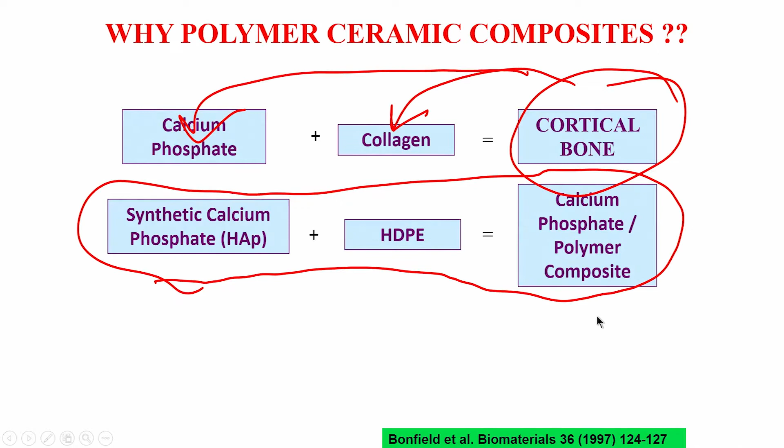These things I have already discussed at length in one of the earlier lectures. So let us start with this tribological study.

The results that I will be showing you in the next few slides are all published in the open literature, and the reader can go through my publications for a more detailed discussion on these particular results.

We have used the fretting wear tester, and the functioning of this fretting wear tester I have also discussed in one of the earlier lectures. Here is a very quick recap of what I mentioned earlier.

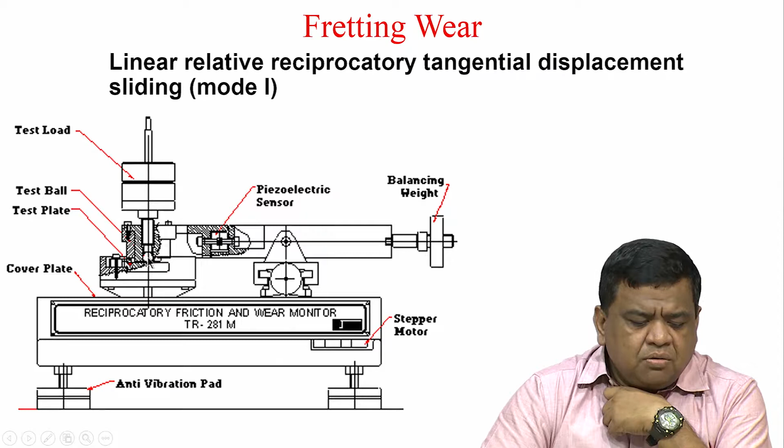So this is your ball and this is the flat. The relative motion at this interface will be actuated by this loading geometry as well as this stepper motor and so on.

This stepper motor is connected directly to this flat. So essentially the ball and flat, with this stepper motor, a very small amplitude relative displacement can be initiated at the ball and flat interface, and through this piezoelectric sensor you can record the frictional force.

This frictional force can be recorded online, and then later used to calculate the coefficient of friction.

Through this test load, this dead weight, you can vary the normal load on this ball and flat kind of geometry.

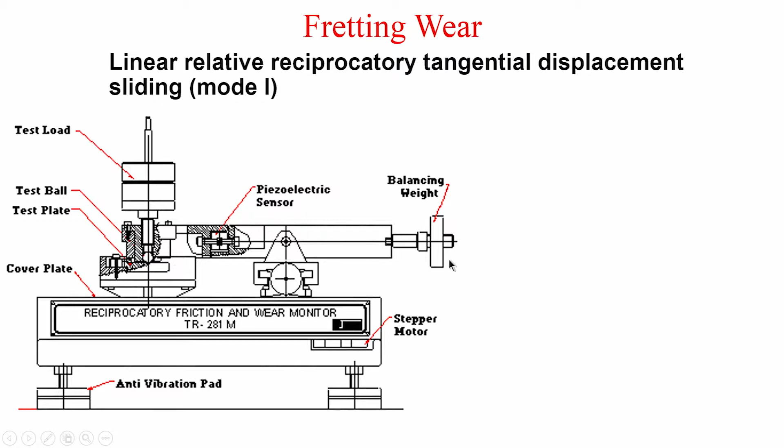As already discussed in the earlier lecture, you have a ceramic or metallic ball, there is a relative displacement, and this is called the stroke length. The stroke length in case of fretting wear varies somewhere between 100 and 200 micron.

This is the high density polyethylene, hydroxyapatite and alumina composite, used with different compositions as flat materials.

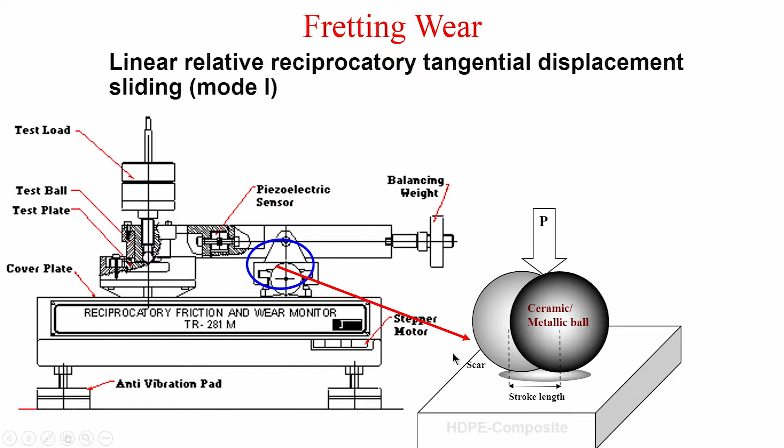While three different mating materials are varied in our study, the constant operating parameters we used are: normal load 10 Newton, frequency 10 hertz, displacement amplitude 80 micron, temperature around ambient temperature, and number of cycles 100,000 cycles.

For the testing environment, we have used dry ambient conditions as well as SBF, that is simulated body fluid.

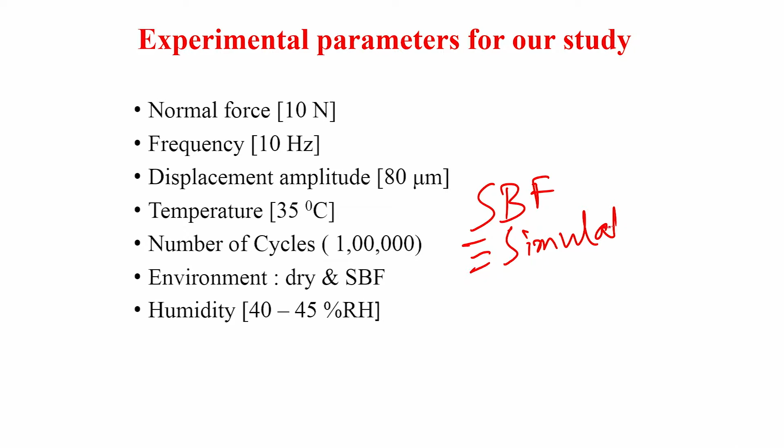Simulated body fluid. So dry means this is either ambient or SBF, and this is your normal load. Normal load is around 10 Newton.

Now this simulated body fluid contains several salts, like NaCl and KCl, with a particular ratio so that the pH is maintained at around 7.4, in terms of chloride ion concentration, pH, and several metallic ions like sodium and potassium ions and so on.

This will mimic very close to the physiological body environment. So that is the reason that normally in many friction and wear experiments which involve biomaterials, they always use the simulated body fluid.

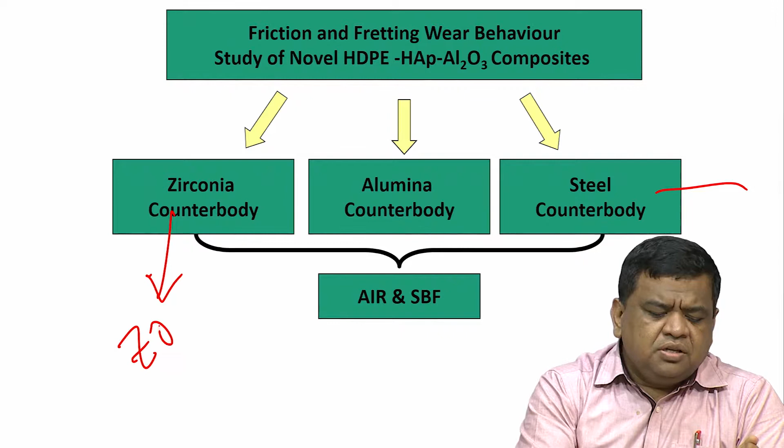So this is the 3 different counter bodies. This is zirconia, the yttria stabilized zirconia we have used; this is the alpha alumina we have used; and this is the steel bearing steel counter body.

Now why these different things, and why we have used ambient conditions and SBF? Why 3 different solids? Because in real life applications, if you recall, you have this femoral stem, and on this femoral stem you have this femoral head, and this femoral head is in contact against this acetabular socket.

Or acetabular liner, which is often metal backed, that is for non-cemented ones. For cemented ones, if the acetabular liner contains hydroxyapatite, it has good osseointegration, and then one can use bone cement. So this is your femoral head FH, and this is your acetabular socket.

Now this acetabular socket is typically made up of ultra high molecular weight polyethylene. So in this study we are trying to evaluate whether that can be potentially replaced by high density polyethylene, HAP, alumina. In order to simulate the clinical scenario in the lab scale study, it is important to consider the femoral head materials.

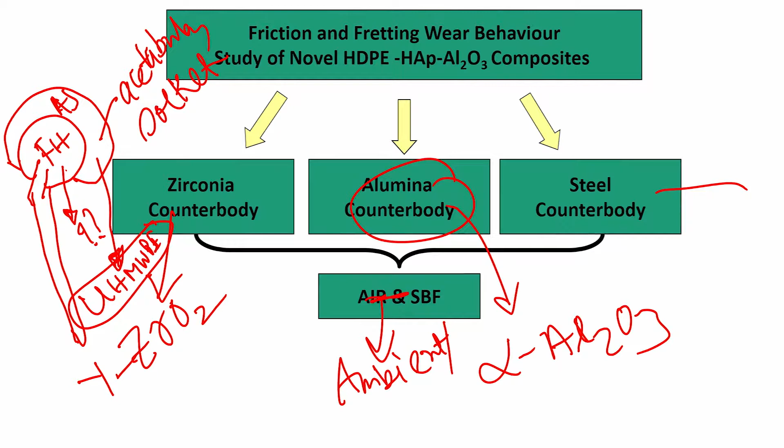These femoral head materials can be either alumina, which is used clinically, or zirconia, or steel balls. So in order to simulate that kind of environment, we have used all 3 counter bodies in our study.

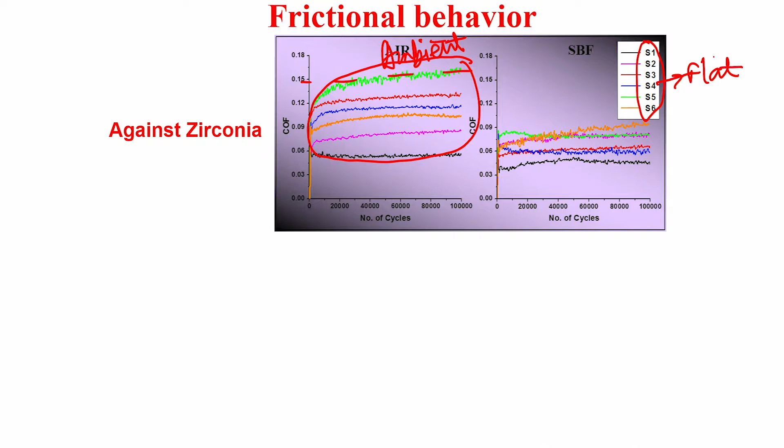So what you see here is that all this S1 to S6 material, these are the flat materials, and your ball is that alumina or zirconia, the ball material counterbody.

So for all these materials, clearly from ambient to SBF there is a reduction in coefficient of friction. Systematically for any given material, if you take the green one, that is S5, it is here 0.15 and here it is 0.08 or something. Even if you go to S1, that particular material, it is fairly small, like 0.03, 0.04 or so on.

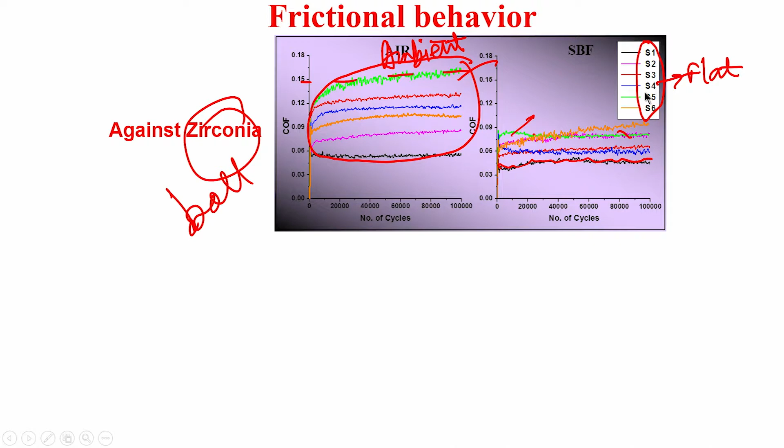Against alumina also, if you see, after zirconia, in case of alumina one can make similar observations. For example, this particular window from 0.15 to 0.06 is now reduced to 0.09 to 0.05 or something. So this reduction in coefficient of friction is certainly quite measurable and quite significant, and this is the case for all these different materials.

So this 0.09 window, the difference in steady state coefficient of friction, is reduced to 0.04. And in case of steel, against the steel counterbody, some of the high coefficient of friction is like 0.15, whereas even the green one, S5, goes to 0.11.

So this reduction may be a little lower in case of the steel counterbody, but certainly if you compare ambient versus simulated body fluid, there is a push towards a lower coefficient of friction in simulated body fluid.

So this is the summary. This is zirconia, this is alumina, and this is steel counterbody. If you now compare ambient versus SBF COF against each of these counterbodies, you will see there is a reduction. For example, with alumina, it goes from 0.1 to 0.06.

If you go to high density polyethylene, HAP and alumina composites, then it goes from 0.1 and to 0.05. So it is almost like 50%, or almost half of what you measure in the ambient conditions.

But if you compare the frictional coefficient measured in the SBF, what you notice is that there is a tendency for the steel coefficient of friction to be relatively higher. For any material, if you compare 0.07 to 0.09, or 0.05 to 0.09, these are SBF results when all the other fretting parameters remain constant.

So we see that when we use steel as a counterbody, there is an increase in the coefficient of friction. In case of alumina, again this frictional coefficient is relatively higher compared to steel. But if you see the frictional coefficient between zirconia and alumina, they many times are either comparable, or in case of alumina a little bit higher.

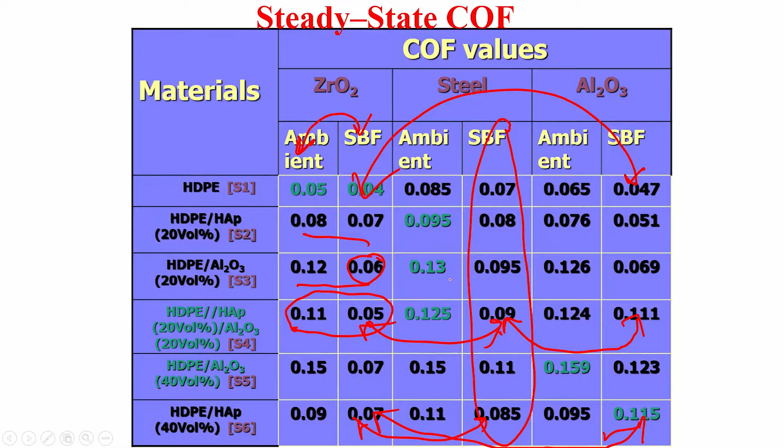Remember, the hardness of alumina is around 19 gigapascal, hardness of zirconia is around 12 gigapascal, and hardness of steel is 7 gigapascal. So if you look at the differences in hardness, alumina is by far the hardest of all these materials.

But then I will come back to that, what is the influence of hardness on the wear mechanisms, later on.

But at this point we can see that there is a difference in the physical properties of the mating materials, that is the balls, and we do see there is a difference in the coefficient of friction when we compare only the simulated body fluid results.

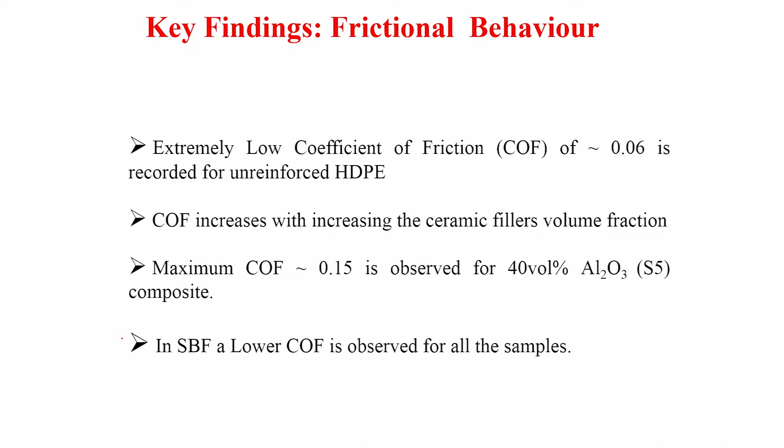Okay, so now these are the key findings. Certainly the coefficient of friction increases with the ceramic fillers, and the maximum coefficient of friction is 0.15. In SBF, lower COF is observed for all the samples.

Next is the wear rate measurements. Now this is the typical wear rate, wear scar that is formed on the material surfaces.

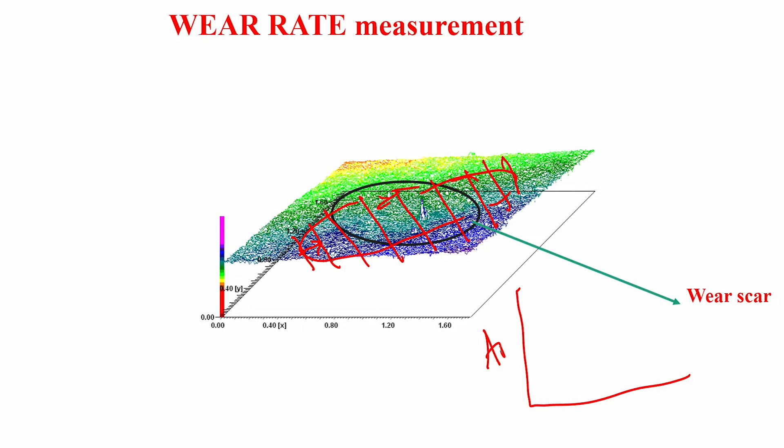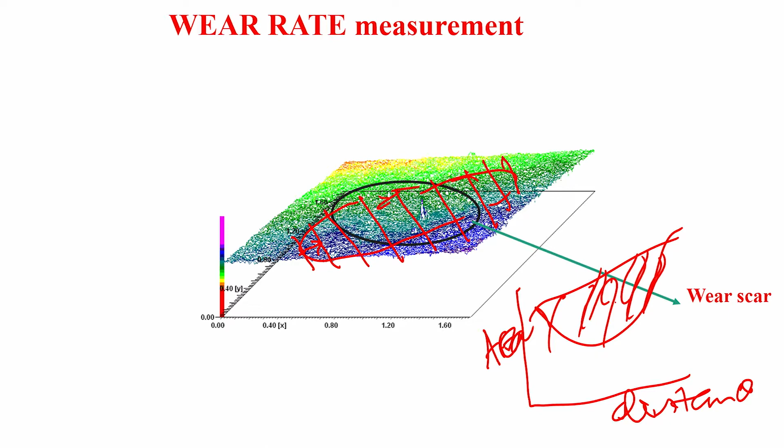I have mentioned in one of the earlier lectures that you take the various 2D profiles at various spatial locations on the wear scar, then plot the area of each profile as a function of distance, and you get this kind of curve. Then you take the area under the curve, and you get the volume - this is the wear volume.

So this wear volume, you can use in calculating the specific wear rate. Specific wear rate is nothing but V divided by D times F, where V is the wear volume, D is the total displacement, like the total fretted wear displacement, and F is the normal load. So then you can get millimeter cube per Newton meter.

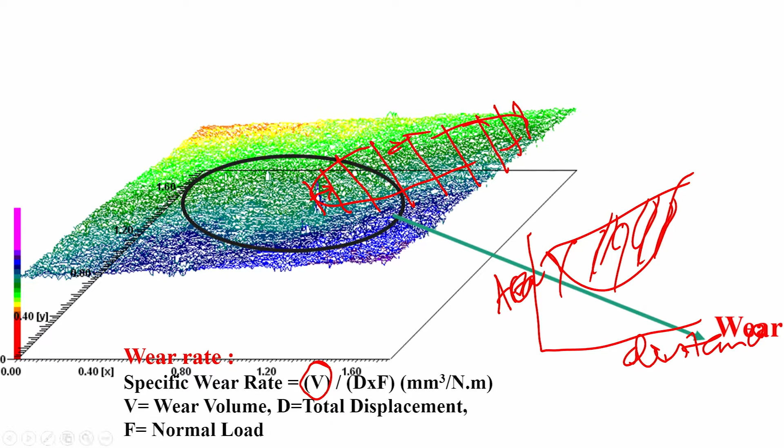Now, wear rate against different counter bodies. If you see this particular case, this is 10 to the power minus 6 - that is the order of magnitude of the wear rate - and this is 10 to the power minus 7.

So in case of alumina, there is generally a 1 order of magnitude difference. But if you look at this 10 to the power minus 7 here, 83 into 10 to the power minus 7 is nothing but 8.3 into 10 to the power minus 6.

So that way this value and this value are comparable.

Now let us look at this table a little closely. If you compare between ambient and SBF, there is a reduction in the wear volume - 7.1 goes to 4.9, 4.3 goes to 2.28, and so on. Similar observations can be made in case of the steel counter body also - 25.2 goes to 11.5, 3.9 goes to 2.3. In case of alumina, 89 goes to 83, 41 goes to 33. So like the friction coefficient, there is also a systematic reduction in the wear rate against each of the counter bodies in the simulated body fluid environment compared to the tests carried out in ambient conditions.

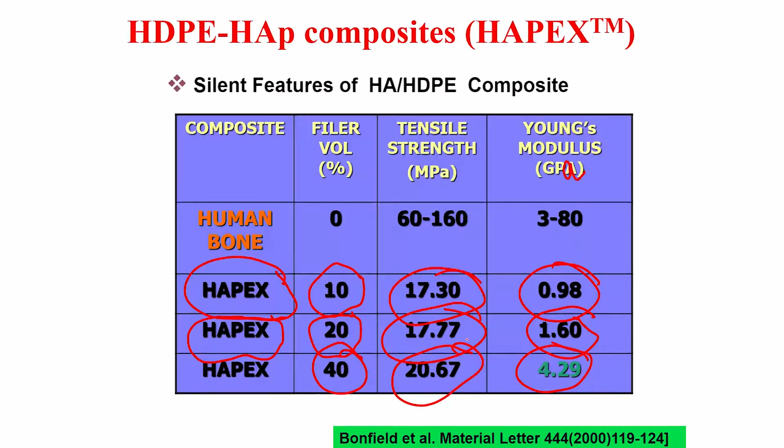5.92 into 10 to the minus 7 means it is 0.5 into 10 to the power minus 6. In case of the high density polyethylene HAp alumina S4 composites, wear rate is reduced against alumina compared to zirconia. Whereas in case of steel, typically the wear rate is much higher. If you look at steel, the wear rate goes from 1.08 to 2.3, almost double, because it is 10 to the power minus 6 and 10 to the minus 6, meaning the magnitude of wear is similar.

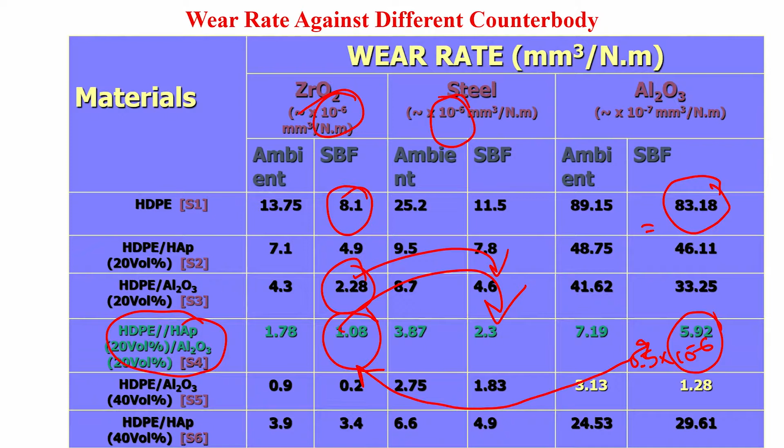Now, when you go to 0.2 to 1.83, again 9 times higher, and if you go to HDP 20% alumina, it goes from 2.28 to 4.6, again about 2 times higher. Typically our observation is that in case of alumina the wear rate in simulated body fluid is either comparable or reduced for a given polymer ceramic composite composition, but in case of steel the wear rate even in simulated body fluid is higher compared to that measured with zirconia or alumina mating materials.

Now, in one of the earlier slides I mentioned that hardness differences should be considered while considering differences in wear, for example wear rate. Now in this slide you see wear rate plotted against hardness of the flat materials. We are not considering here the hardness of the mating materials, but this is against steel.

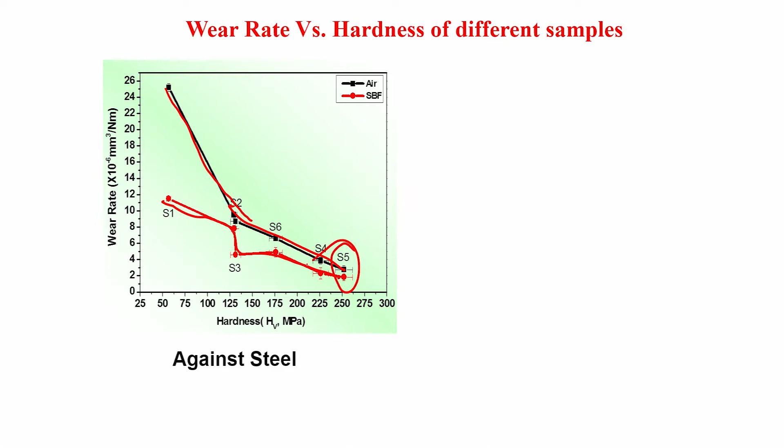So, when steel is used as a counter body, going from S1 to S5, you see there is a reduction in ambient conditions. But there is also a reduction in simulated body fluid, though that reduction in ambient is much more significant compared to the reduction in simulated body fluid. This means that in simulated body fluid wear rate is anyway lower, but we have observed, particularly in case of S5, a much lower wear rate can be measured against steel.

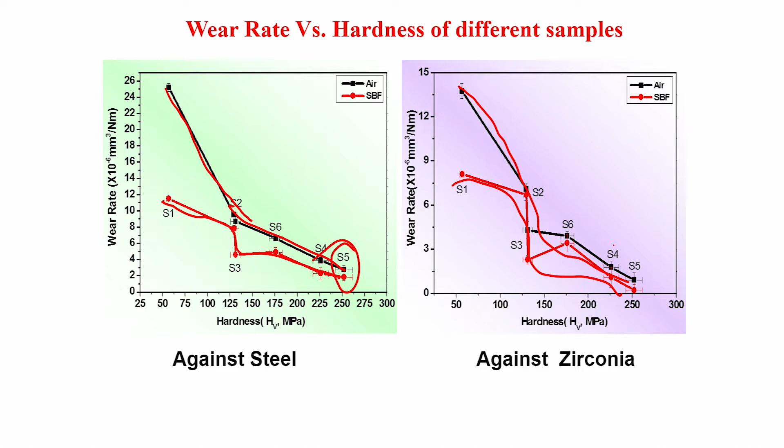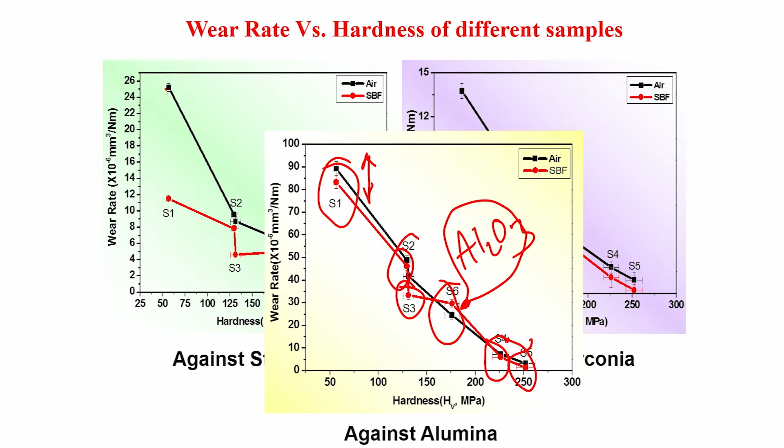So against the alumina counter body, this is a very interesting or intriguing observation we have noticed: all the materials experience similar wear irrespective of ambient or simulated body fluid environment. However, there is a difference among the flat materials themselves, and a similar qualitative trend was observed as in case of steel or zirconia counter body. So the key findings are that the lowest wear rate is observed in case of alumina, maximum wear rate is against steel, and wear rate decreases with increasing hardness.

This points towards the Archard law for abrasive wear. In case of an abrasive wear dominated situation, typically the wear rate decreases with the hardness of the material.

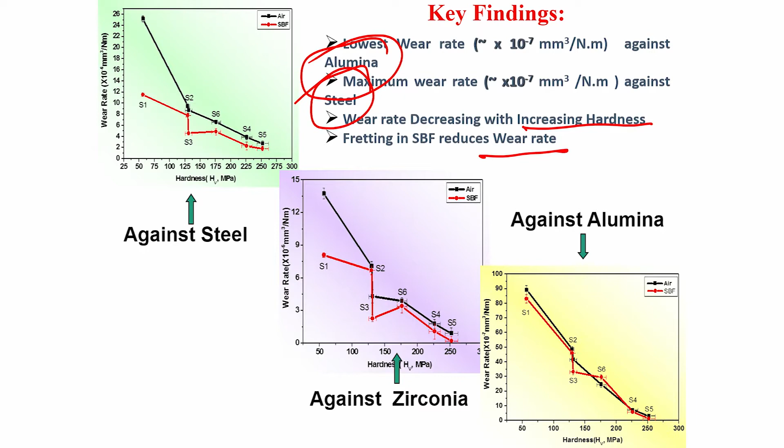Now, the severity of wear is not only measured by the wear rate, but also by the wear depth. Here you see how this wear depth decreases with hardness of the materials. Wear depth here means the maximum wear depth. If you take the several profiles and line them up, this maximum is what is reported along the y axis. So essentially you see that wear depth is less than 10 microns, that is the first observation.

Second observation is that there is a clear decrease in the wear depth with the hardness of the flat material, but the qualitative trend is almost similar to that of the variation of wear rate against hardness.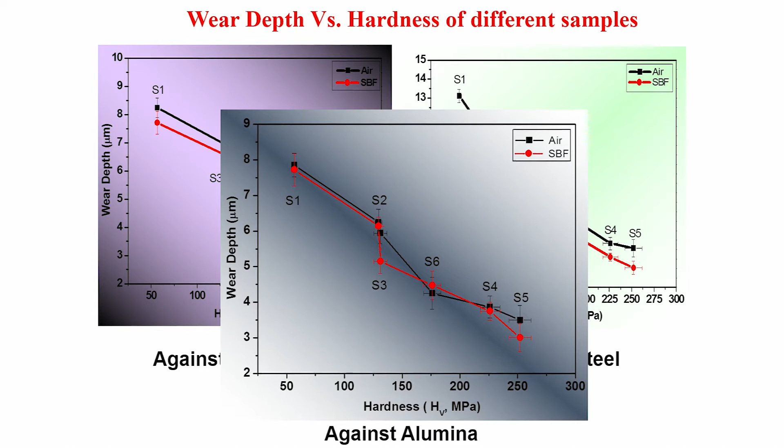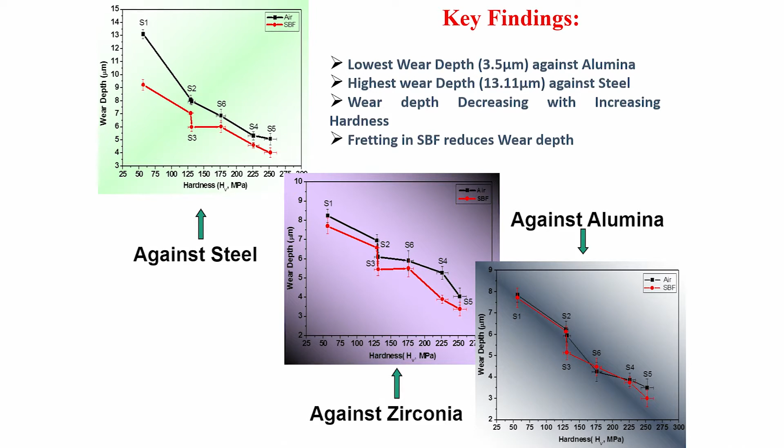And in case of alumina, as you have seen in the wear rate also, there is absolutely no statistically significant difference between the wear depth measured in the ambient environment and the wear depth measured in simulated body fluid after fretting testing. This is the comparison against steel, zirconia and alumina, showing the findings in terms of wear rate and wear depth variation with hardness.

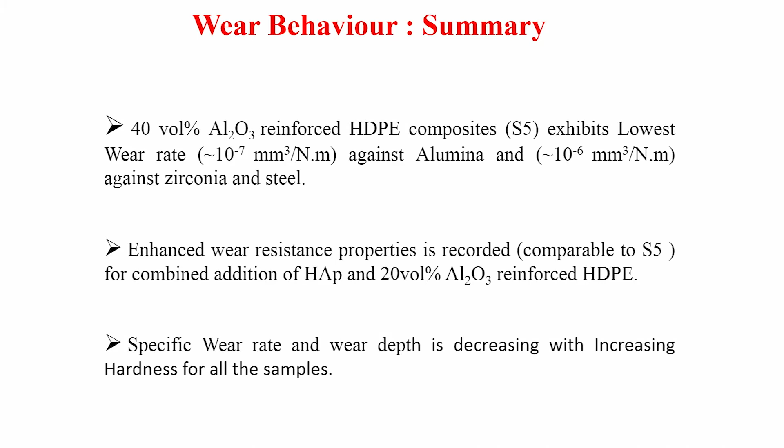Now this is the typical summary of the wear in terms of quantitative analysis of wear rate and wear depth, but more interestingly, as I said before, wear mechanism is what we normally investigate and get very excited about in the domain of material science. So we have invested a lot of effort to understand how these wear mechanisms differ.

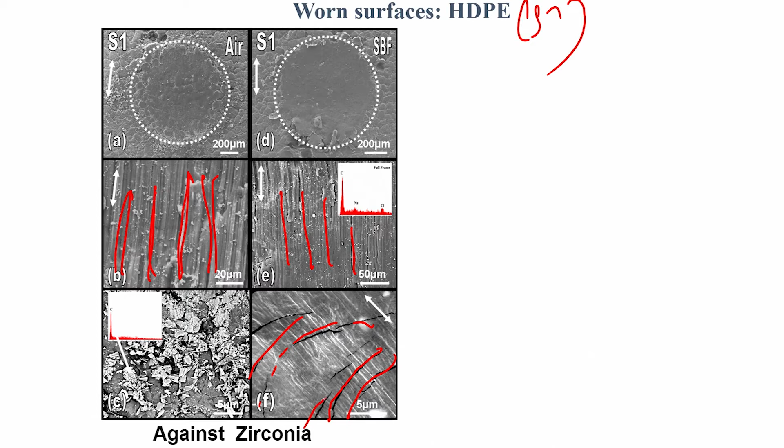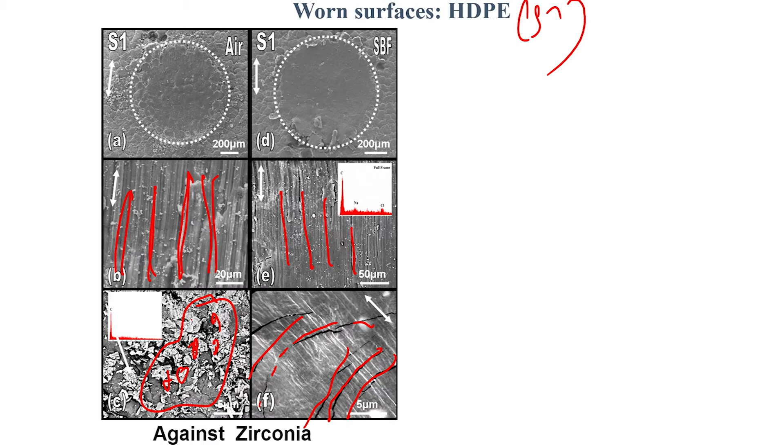Let us look first at HDPE, the S1 sample. In HDPE you see a very clear signature of very deep abrasive grooves and scratches observed in ambient conditions. In SBF, the severity of the abrasion is reduced, but more interestingly there is some concentric cracking observed on the fretted surface. This is a chunk of wear debris particles, mostly polymeric wear debris, observed when the materials are tested against zirconia.

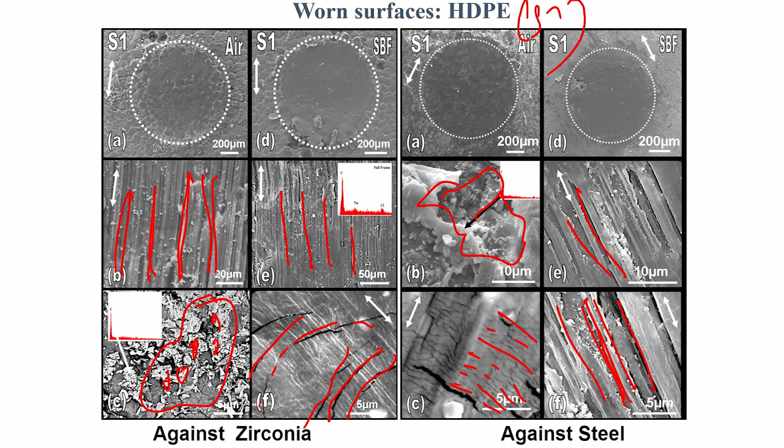Now what happens in case of steel? Since the wear rate is higher, you can see much deeper abrasive scratches, and if you look at some of these deeper abrasive grooves, you can see signs of abrasion and also cracking. Like in the previous case, we have also seen micro cracks coalescing together to form concentric cracking in the ambient conditions.

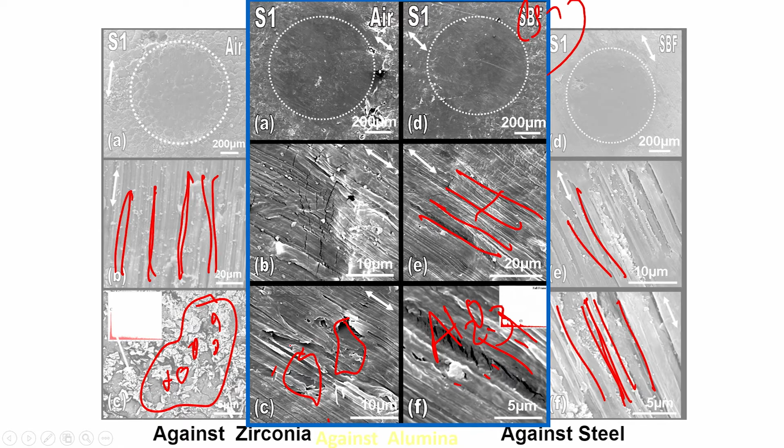And this is what happens when you do the test against alumina as a counter body. Again there are signs of abrasive wear, but certainly some of the signatures of the very severe wear as in the case of steel were not found after the test with alumina.

Now, just a brief background to abrasive wear. Abrasive wear is when harder asperities scratch away material from softer surfaces, leading to a large amount of wear debris, and ultimately when it continues it also causes delamination wear.

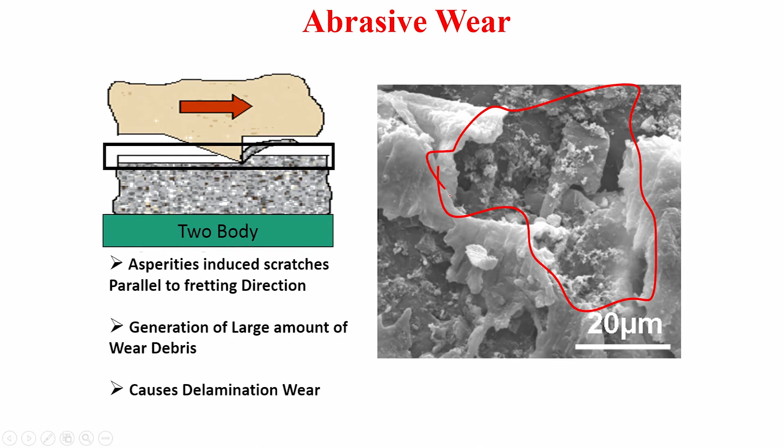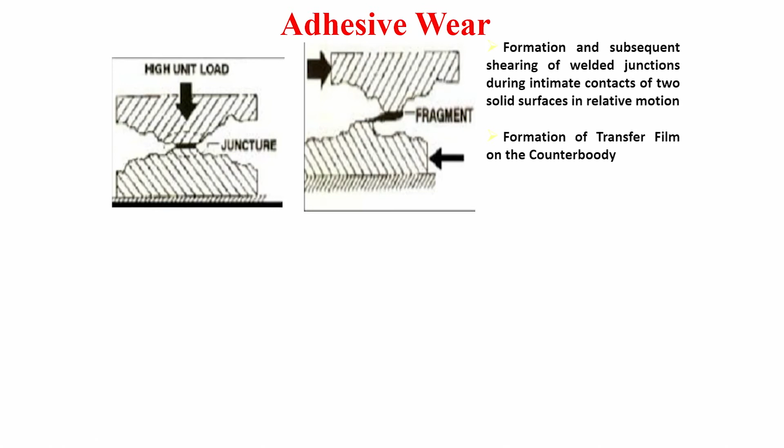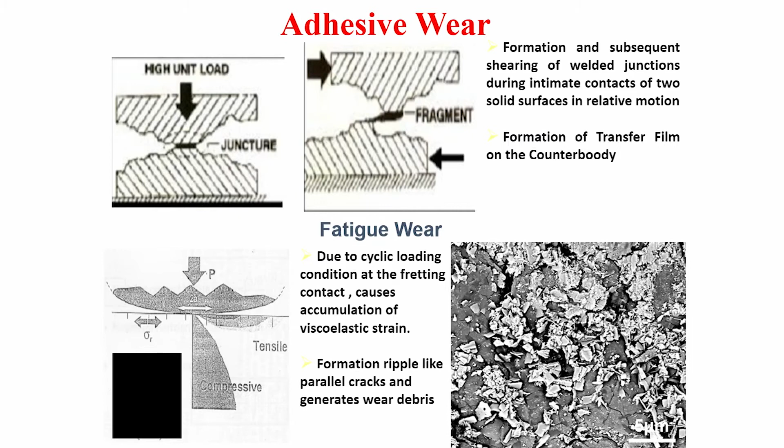These are some of the observations we have found, like a signature of delamination wear also. This is the case for adhesive wear. Adhesive wear mostly takes place between two mating materials of similar composition, and there is also a transfer film on the counter body. And there is fatigue wear, which is experienced when there is cyclic loading at the fretting contact.

We have done very systematic analysis for all the materials, but what is more important for you to see is the fundamental difference in the wear surface morphology in case of HDPE with 20% HAP and 20% alumina compared to pure HDPE.

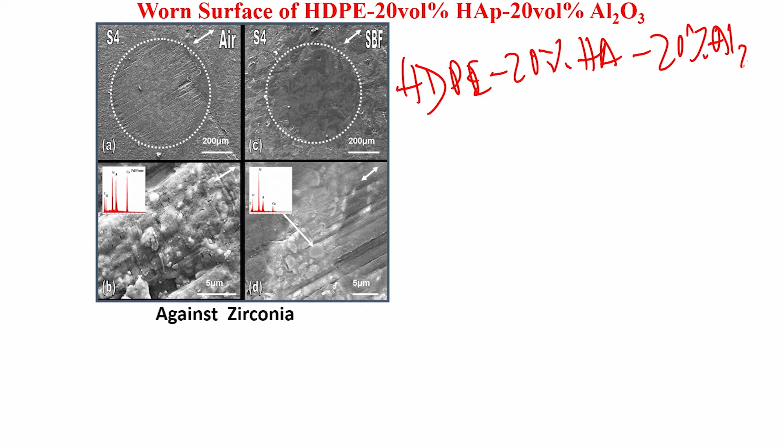Now what you notice here in the ambient conditions and SBF simulated body fluid, with zirconia as a counter body, the severity of abrasive scratch wear is certainly reduced, and in zirconia you will also see hydroxyapatite particles here, and the EDS compositional analysis spectra show peaks of calcium and phosphorus because of the hydroxyapatite phase present.

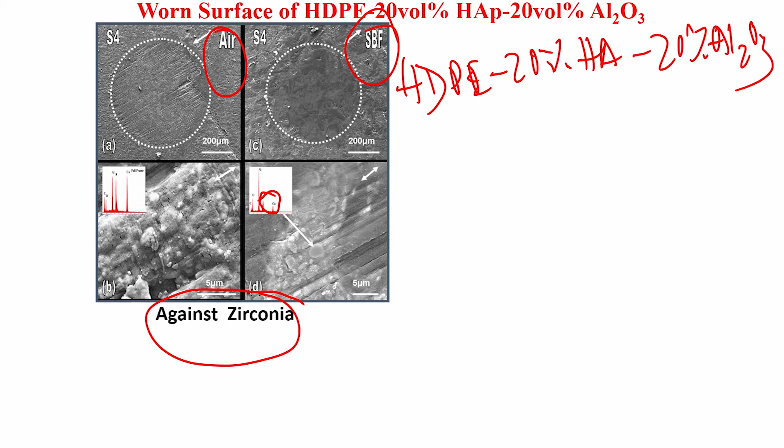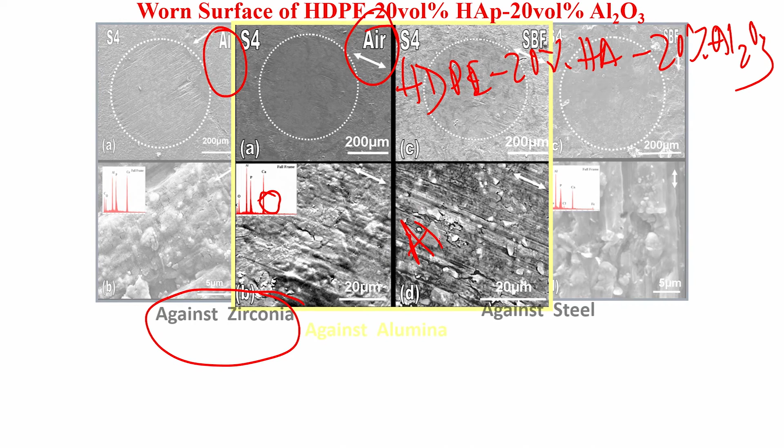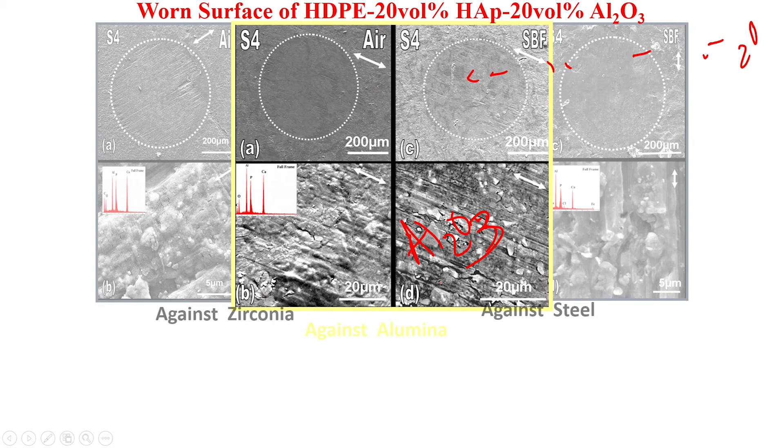And similar things we have seen in case of steel, and more importantly when it goes to alumina as a counter body, these are the pits you can see, and again the severity of abrasion is far more reduced.

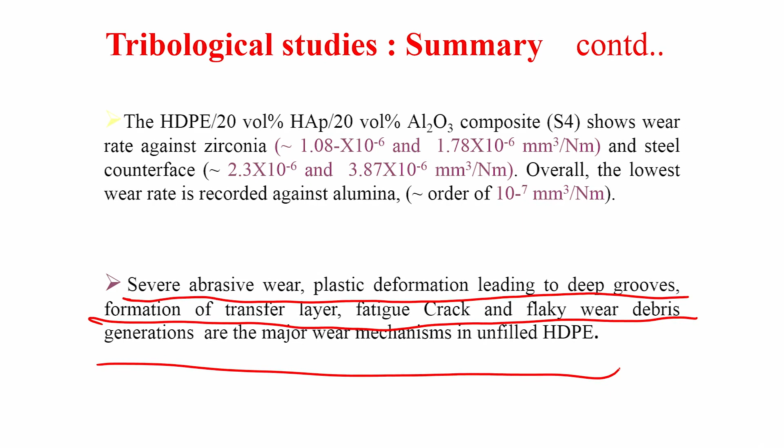So these are the other materials we have also investigated, and the summary is that HDPE with 20% HAp and 20% alumina exhibit a moderate COF, and their wear depth is fairly small, less than 10 micron, experiencing mostly abrasive and plastic deformation leading to grooves, fatigue cracks and flaky wear debris, like the unfilled HDPE. Thank you.